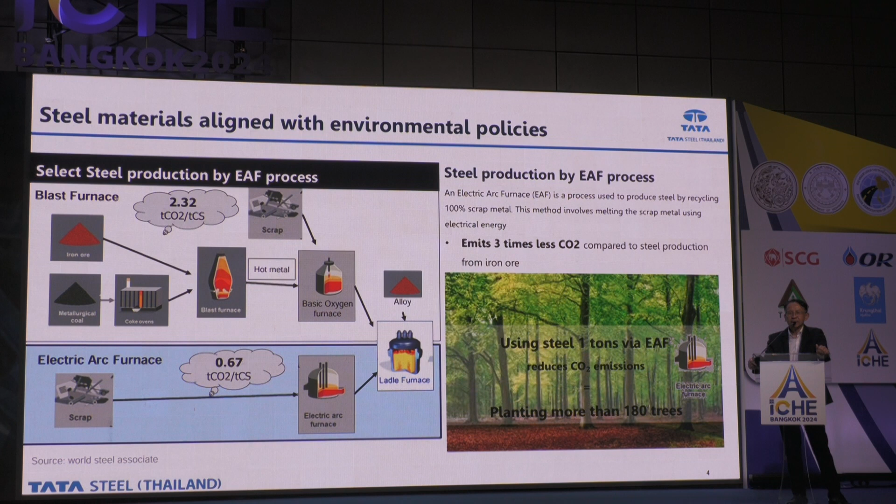In construction rebar, there are two processes to produce it. One comes from the blast furnace, which uses iron ore as raw material. The other process comes from the electric arc furnace, which uses recycled material, meaning scrap as raw material. But most steel companies that produce rebar use the blast furnace process, around 70 to 75%.

The point is that the blast furnace, which uses iron ore, generates carbon emissions of about 2.32 tons of carbon per ton of liquid steel. But the electric arc furnace, when producing steel or rebar, generates carbon emissions of only 0.67 tons, which is almost three times less than the conventional process.

This is one way to reduce carbon emissions for our planet. So comparing the two, we know it's 3 times reduced from producing rebar via electric arc furnace using scrap. If we use 1 ton of electric arc furnace rebar, it will save about 180 trees in terms of reduced carbon emissions.

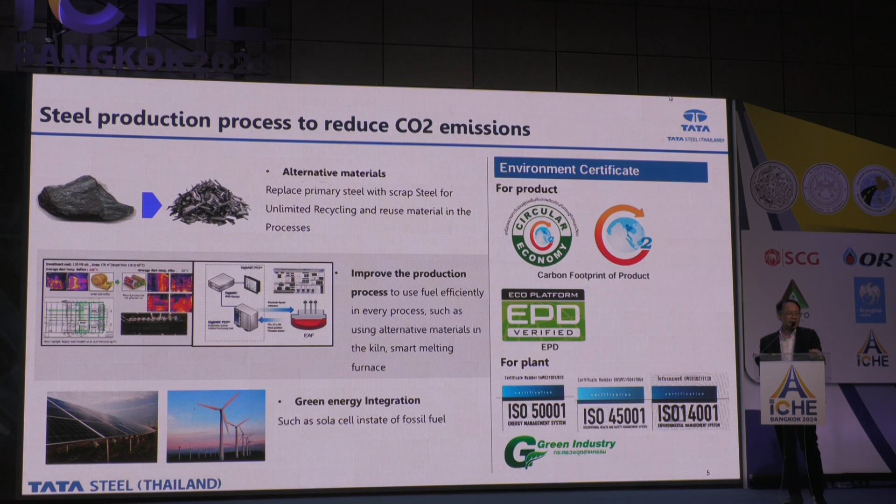Next please. Apart from the raw material that the electric arc furnace uses, we are also thinking about how to reduce the amount of steel needed. So the manufacturer can design, regulate, or improve the material or quality of the product. Instead of using plain steel, we can use high tensile steel, which reduces the quantity of steel needed. For example, if we use high tensile steel for construction, what we now call SD50, it can reduce usage by up to 20%, which means around 14 tons.

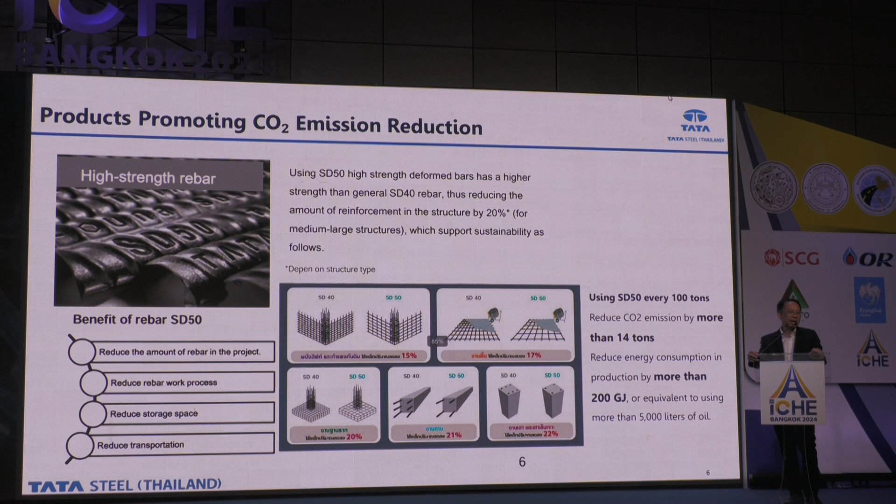So if we use the conventional steel, it will be higher than SD50, around 14 tons. This is just an example.

Apart from the materials - manufacturers try to reduce the time, because time is very important in terms of construction and also in terms of waste. So manufacturers also try to develop or introduce cut and bend from the plant. That means it can reduce waste and time, and also the quality will be improved, every shape will be as per the standard.

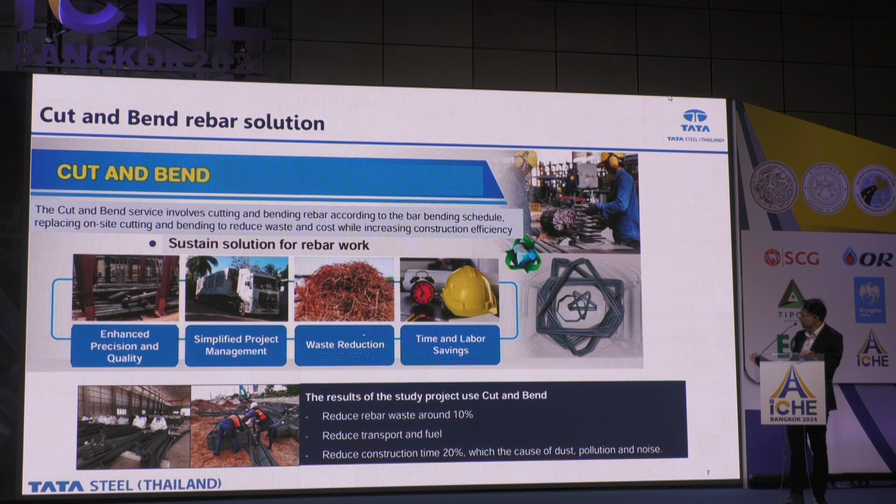So this is the overall of what I would like to tell today. One important thing is that manufacturers will try to improve or find ways to support construction in order to achieve sustainability. One is the electric arc furnace rebar, which can reduce 1/3 of the carbon CO2 emission. The other is to use high tensile or cut and bend rebar. This will improve the sustainability of our earth. Thank you very much.

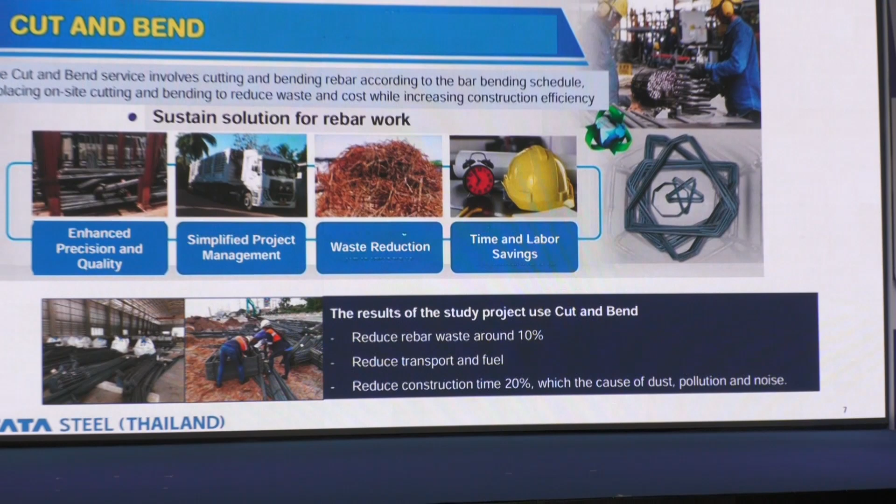Okay, thank you so much for a very interesting topic. If we integrate the manufacturers to be greener in process, particularly to reduce the CO2 footprint from the industry, it's going to ensure that the Department of Highway can develop highway construction projects that use not only digital construction but also friendly material construction. That is going to lead our society toward resilient and sustainable infrastructure development.

Okay, for the second opening speech, it ends like this. So the next session is going to be very interesting as well. Our session has 4 experts who are going to join, coming from the digital construction industry and also environmental and infrastructure monitoring technologies.

So let me introduce the first speaker onto the stage, Mr. Eddie Hong from Midas IT, South Korea. For the first topic, it's going to be about BIM and digital technology for design. Today we are very pleased to have our speaker, who is very expert in BIM and digital software, Mr. Eddie Hong. Let's give a warm welcome to Eddie Hong for the presentation on Midas CIM for engineers, utilization of CIM.

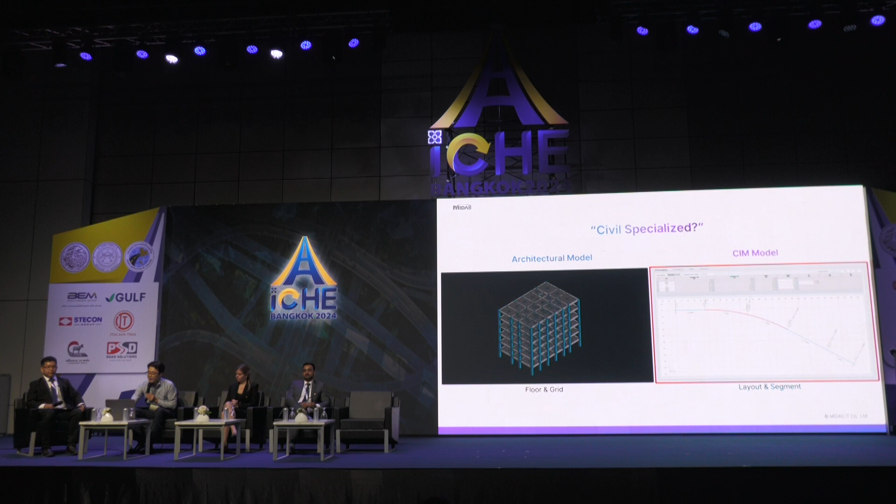I used the term civil-specialized earlier. Why did I say that? Typical architecture modeling tools support floor and grid-based modeling. For real work, it is difficult to present a 3D model of civil structures such as bridges, roads, and tunnels using that approach. However, CIM is a modeling tool based on layouts and segments, so civil structures are laid out along linear lines, as shown in the image.

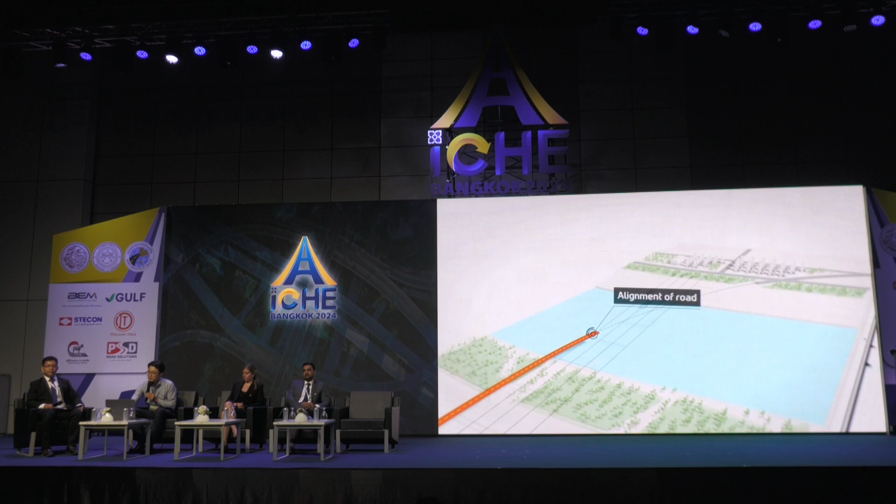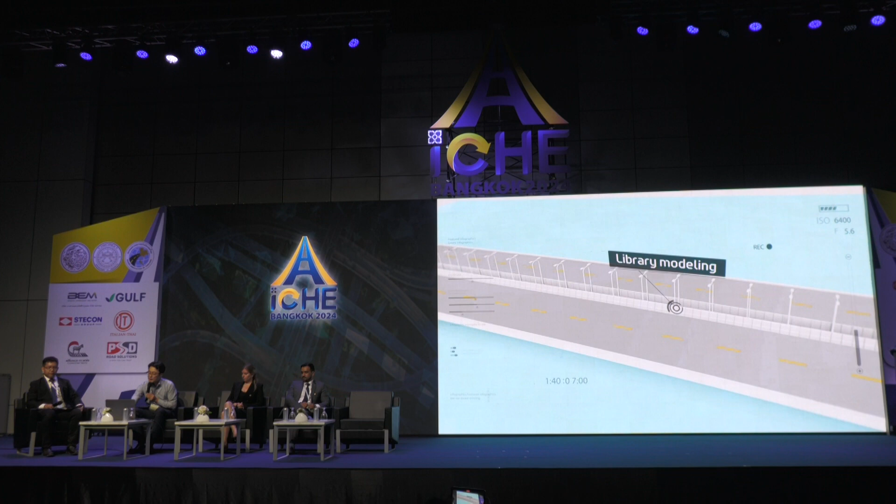This video is about 3 minutes, covering the Midas CIM concept. In our experience, when we work on civil engineering projects, we usually plan a linear line and build a bridge when crossing the sea or river. In the case of CIM, the model is completed by assigning the model to the location where the bridge is on the linear line. The model is also linked to the changed alignment, reducing the modification time for all engineers.

If we change the layout line, it will upgrade directly in the modeling. We can also check the value of intervals or update the model automatically. Our CIM program represents detailed rebar arrangements, even including tendons, splice joints, and coupler assignments.

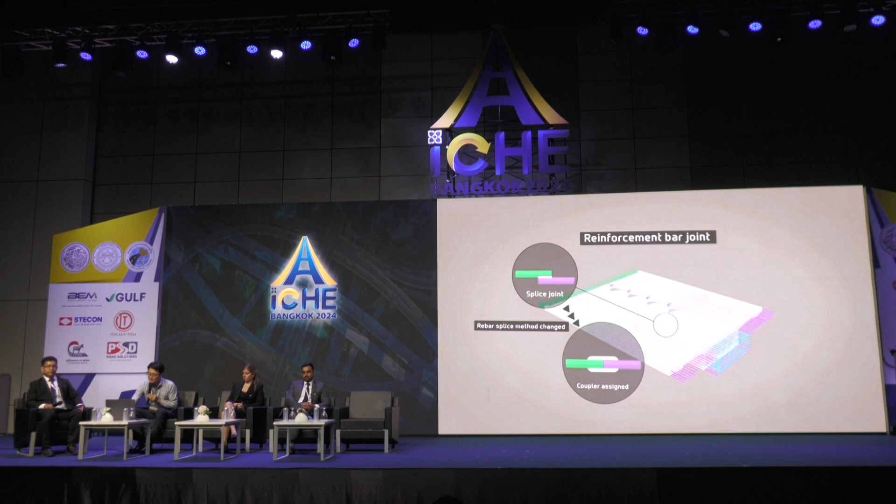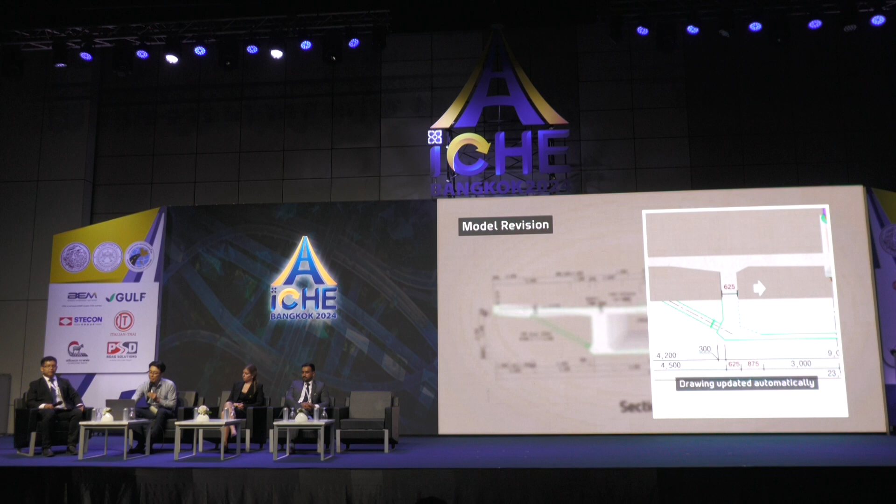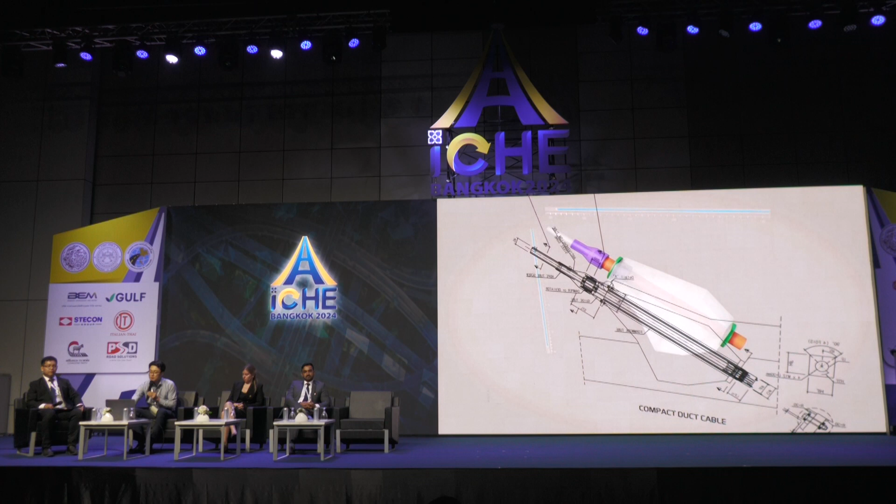Lastly, we can check and generate the 2D drawings from 3D modeling, and we align the 2D and 3D model. So if we change some parameters in the 2D drawings, we can upgrade directly to the 3D model. And finally, we export to the civil software, by which we can analyze the FE model.

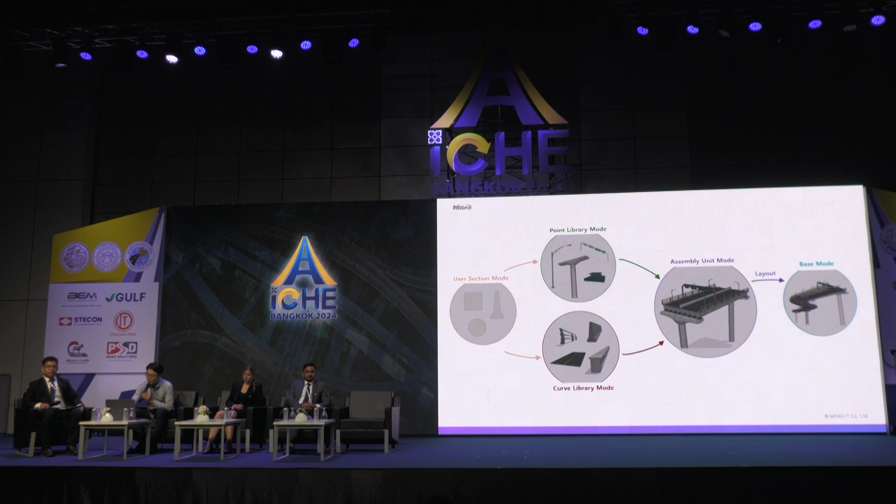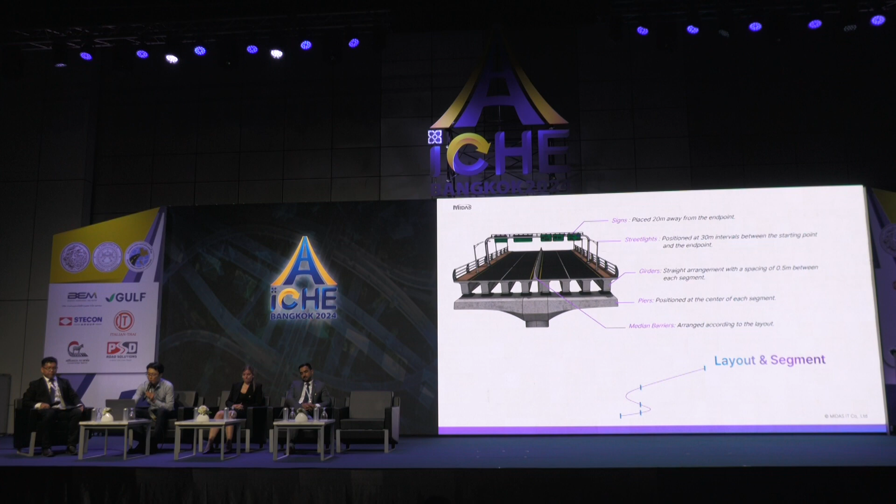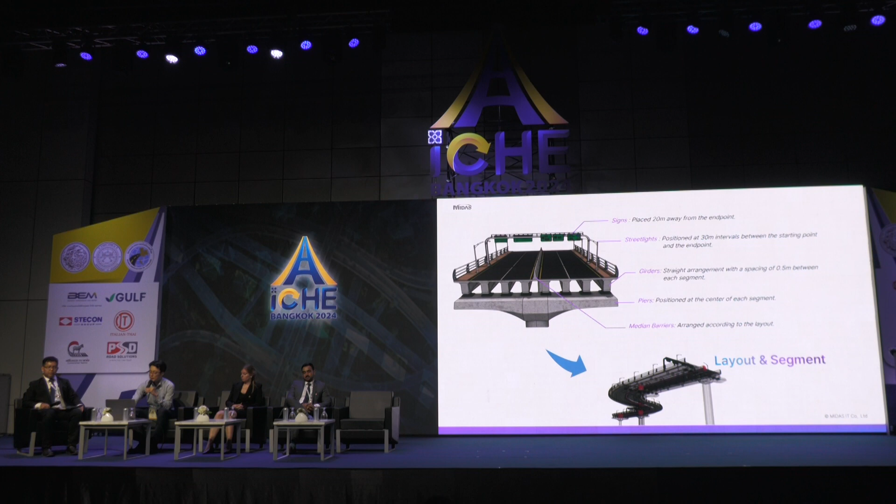That assigns the assembly libraries to the linear to create the final model. So we can make a model of all these components, like signs, even piers and barriers. And lastly, if we make a model of the libraries, and then assign the layout, and finalize the 3D model. So let's go ahead and show you how to actually model the bridge in CIM.

I would like to introduce the smart template and catalogs. We already have some libraries in the software, so we can check some libraries and modify the pre-stressed concrete bridge, check the layout, and then make a modification in the smart template library for girder ranks or other components. And lastly, we can check the other components.

And then sorry. Okay.

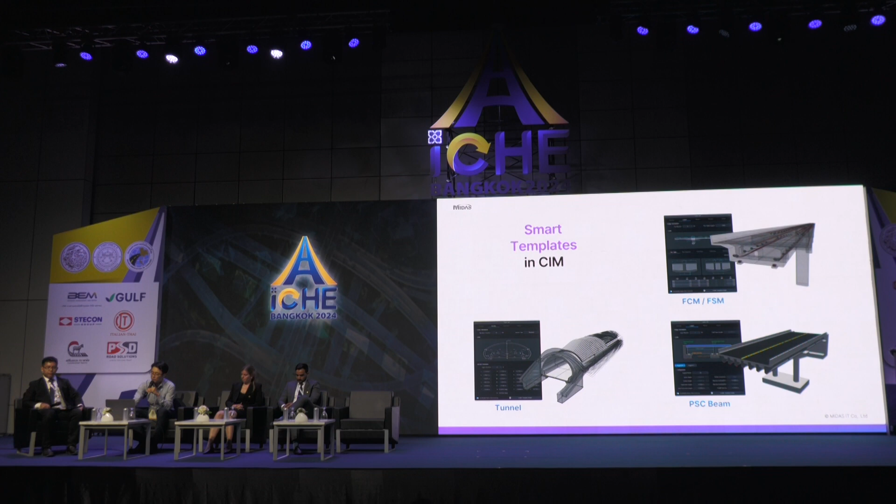Besides the PSC beam bridges, there are many other templates in CIM, like tunnel and other bridge methods, FCM, FSM. We even offer special bridges like cable-stayed and suspension bridges. You may not use these often, but they can be useful if you need to compare bridge types in the planning stage.

And as I mentioned earlier, there are about 200 libraries built into our catalog. So you can just download and use them if you need to. You can modify and adapt them. In fact, you will be more efficient in your work by modifying and adapting provided libraries rather than creating them from scratch.

So far, you are getting the idea of modeling. How can we utilize this software? So let's take a look into how you can utilize the model you have created. In CIM, you can actually do a lot of different things with the model that you create.

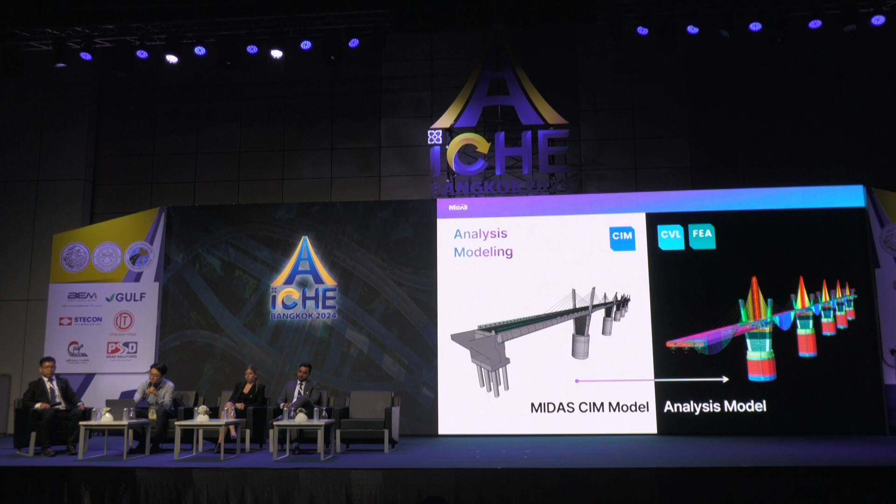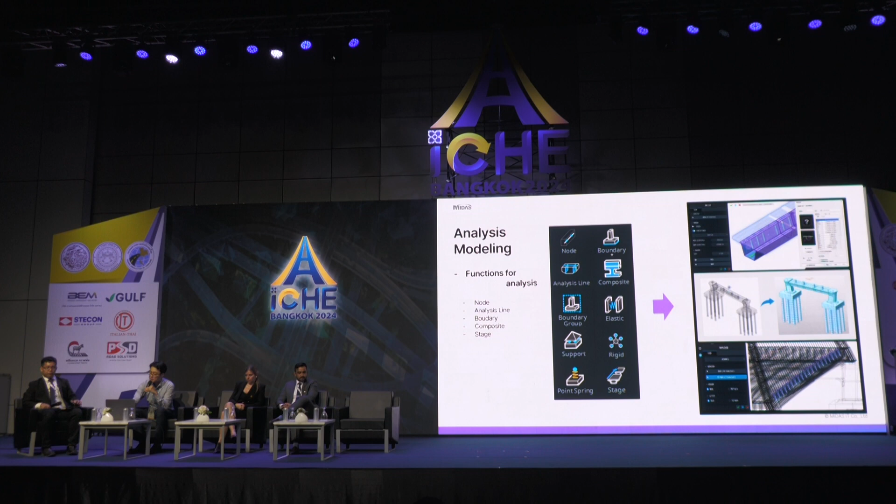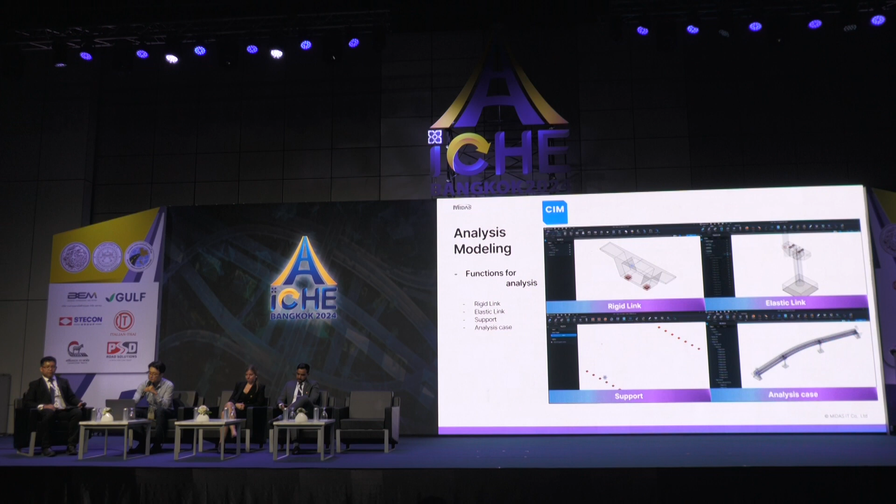Let's take a look at how we can use these features to export a 3D model. We can just create the analytical model using these features.

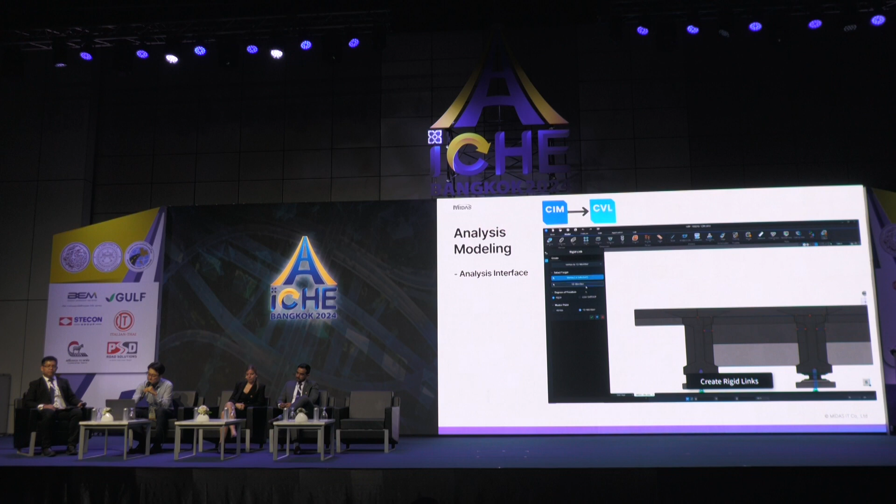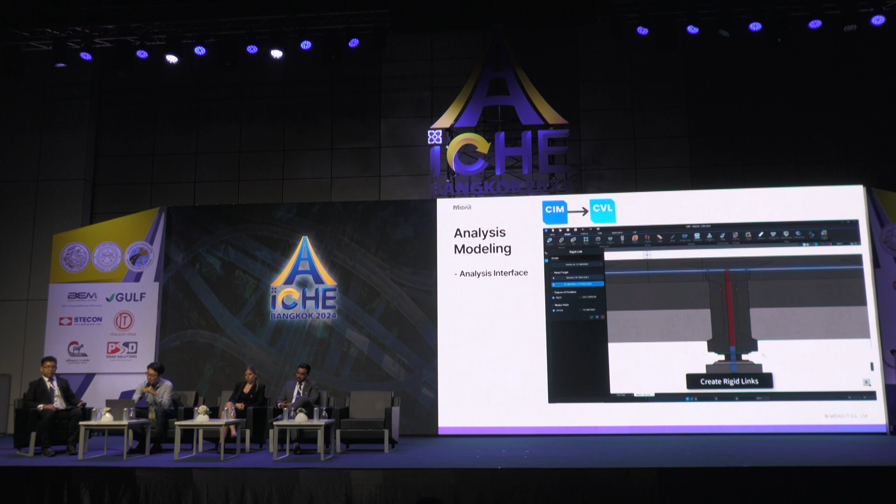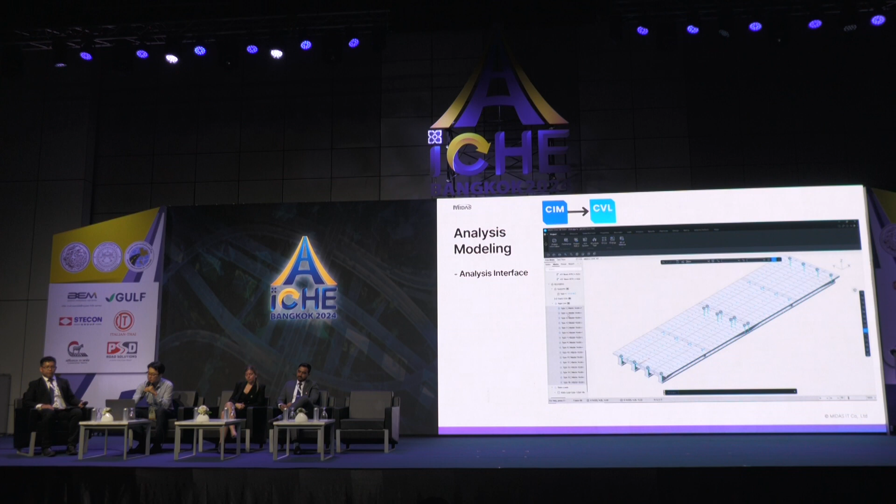If we change the girder with a composite section to create the grid model, after defining the case conditions to create the analysis model in this mode, and click export, the analysis model will be created in our Midas Civil software. And finally, you can see the boundary conditions and section information that we applied earlier in the CIM model.

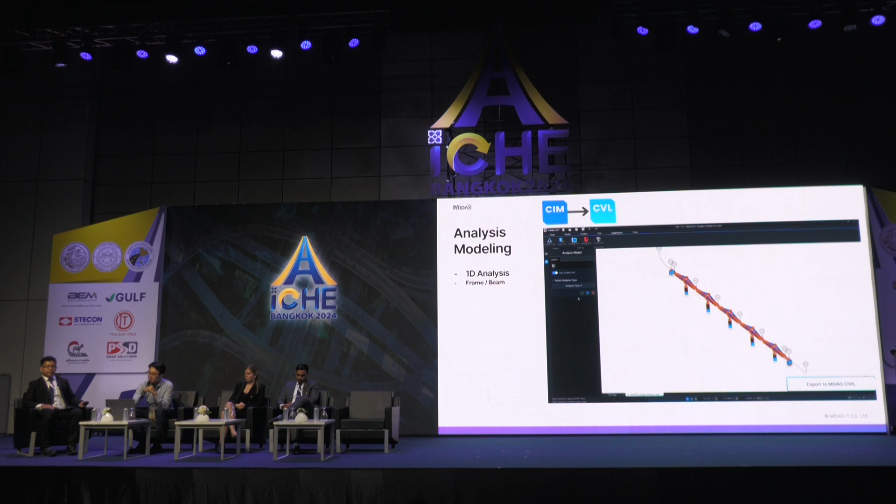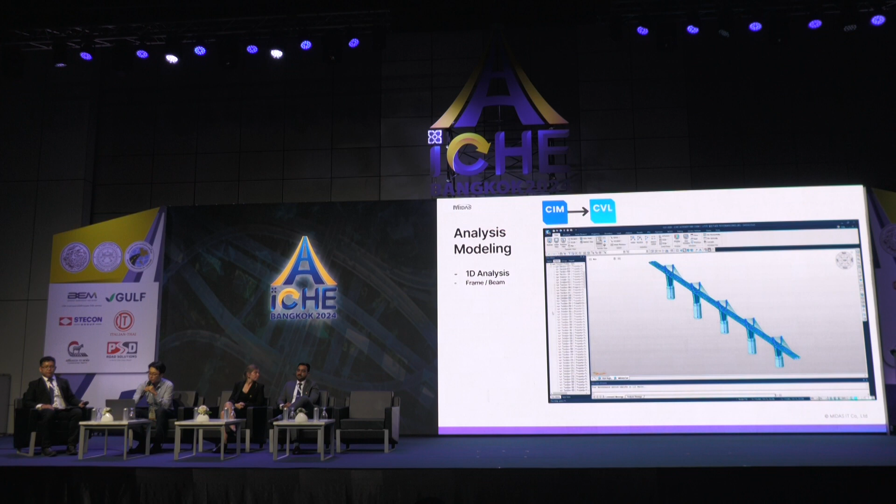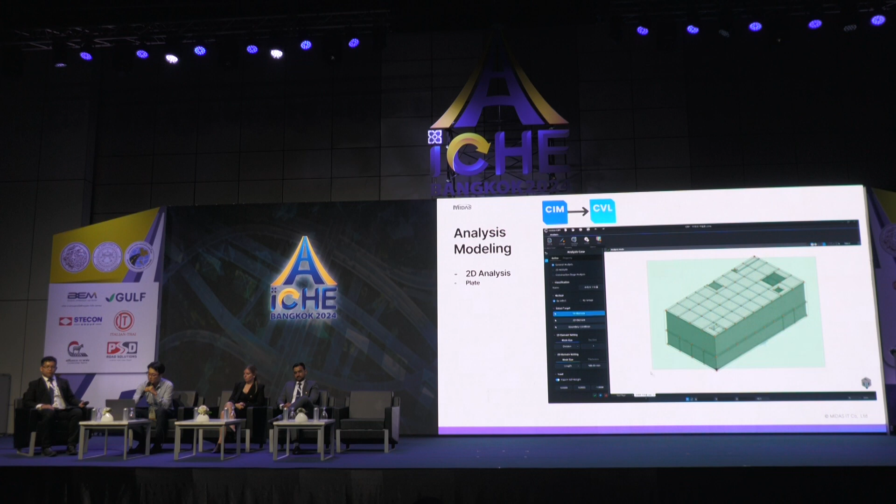Is this only possible for this bridge? No, it doesn't have to be. Special bridges with tendons like this can also be interacted with. Of course, additional loads and load combinations are required, but the modeling works very well.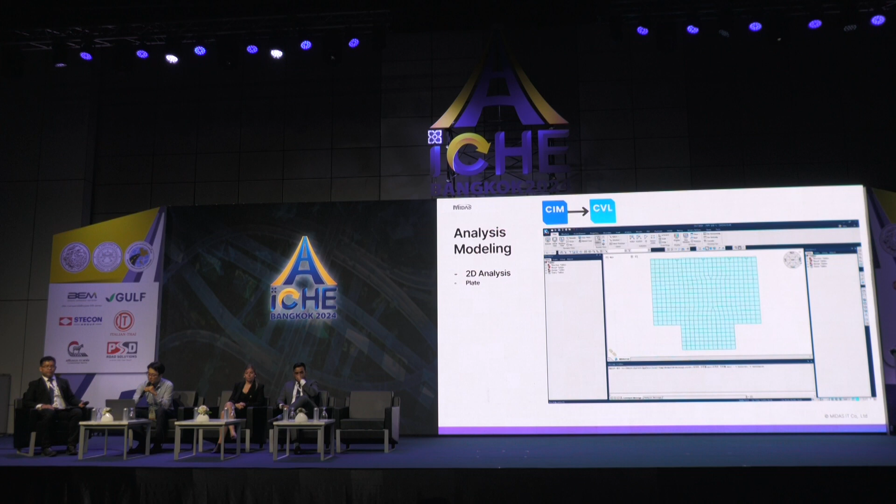When designing a structure with complex forces, a 3D analysis model may be required by the client. So if you need a plate model, such as the structure in the video, you can easily link to 2D plate elements using the slab elements feature. So you can see how well it works.

And in this part, as you can see, the parasolid type object provided in the CIM model is exported to FEA software to perform FEM analysis.

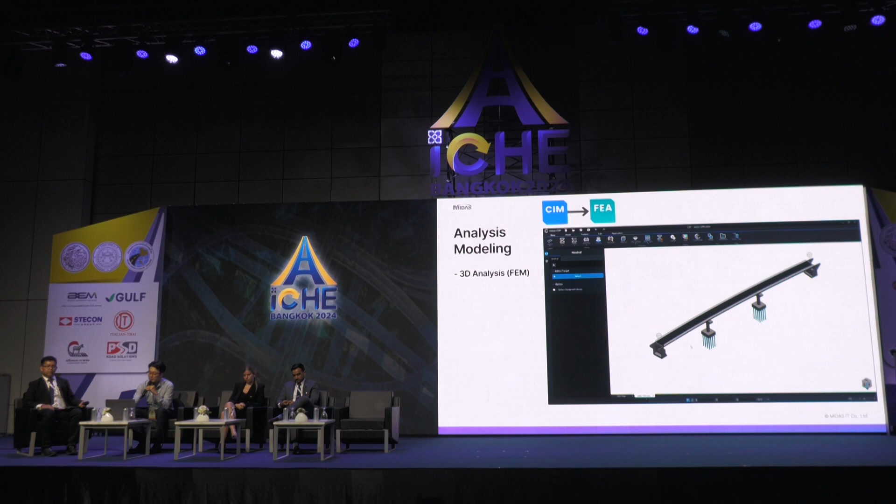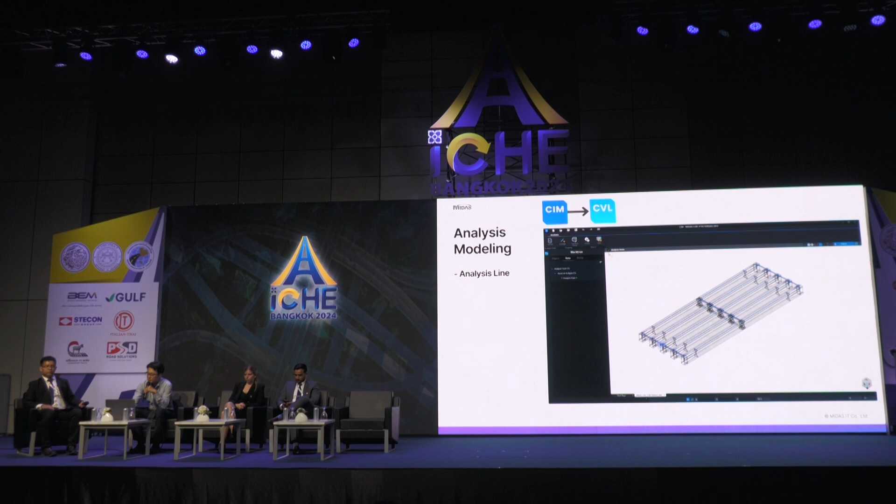Models created in other 3D tools like Revit software or other 3D BIM software can also be imported this way to create an analytical model. In this video, a parasolid model created in another software is imported into CIM and then used to create the analysis model using the analysis line function.

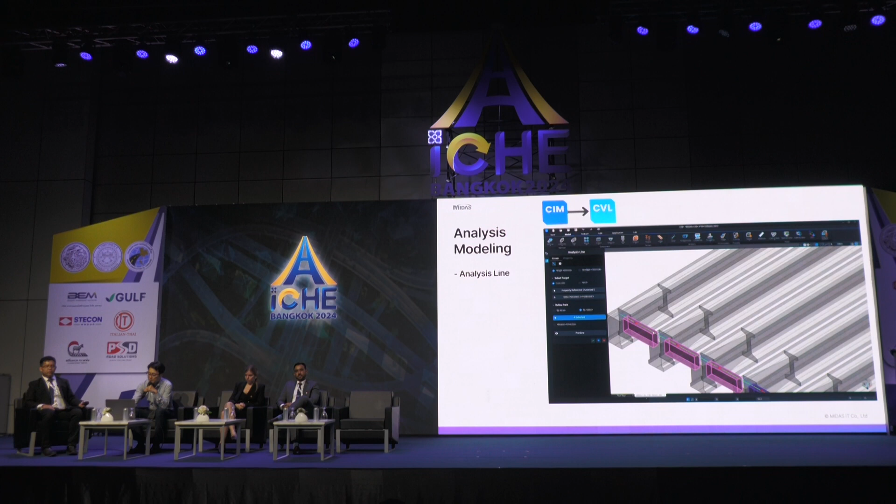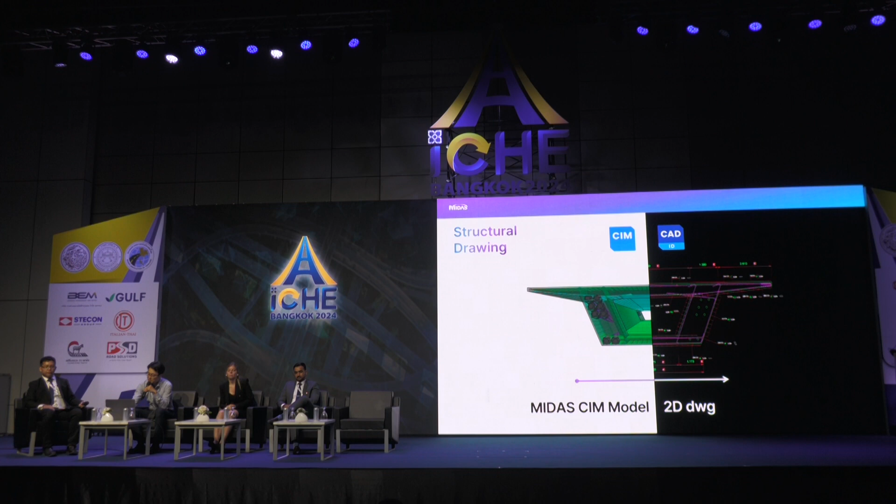I think everybody has different needs depending on their role and the size and strategy of their company. Some of you are engineers, so drawing capabilities matter. It depends on your industry, but drawings are always required as part of design.

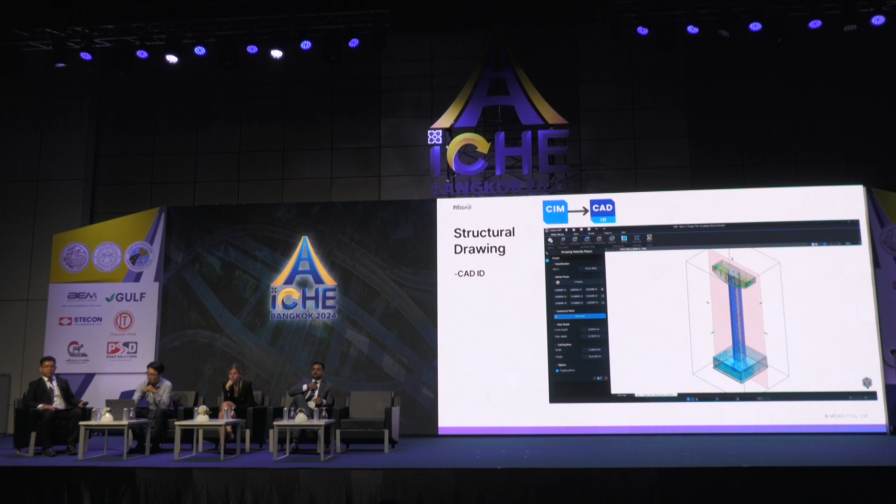In short, in CIM you can extract drawings using the drawing functions. You can create a section drawing of any section, and rebar drawings with bar width. You can extract the geometry and draw it, simply exporting dimension lines.

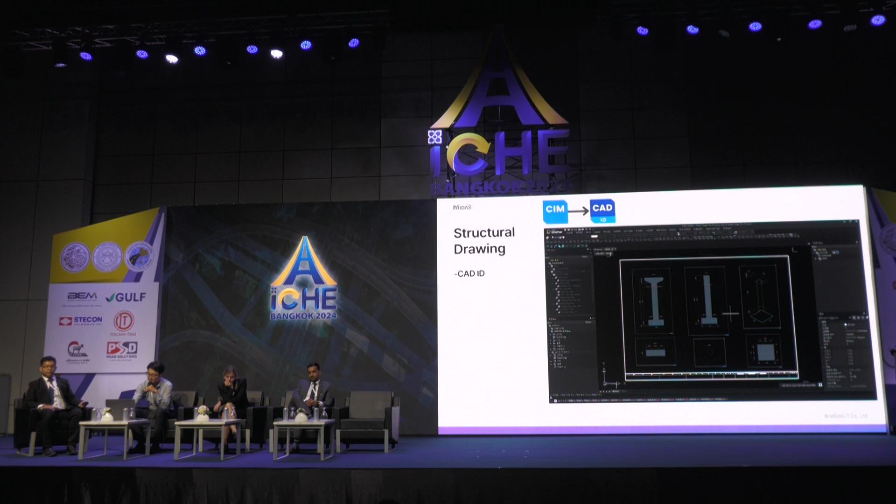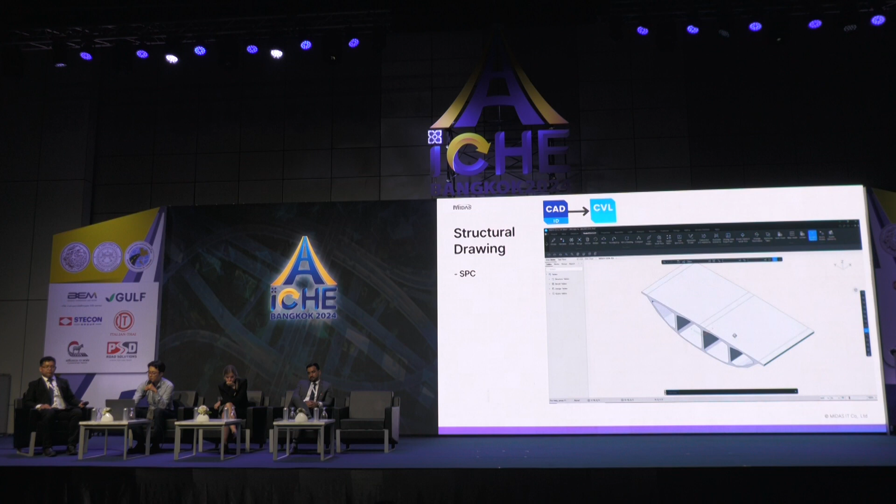Also, when using existing civil features for general sections that are not provided as DB sections, you have to create sections through the SPC function. Some people may have difficulty using it, but now you can do this with Midas CAD software design as well.

There are a lot more functions in CIM. In the following, I will introduce other various features of CIM.

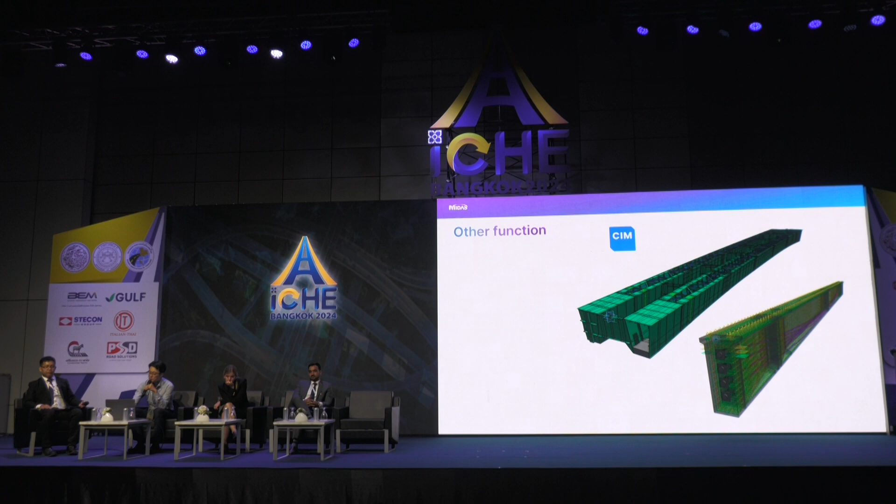First, this is a feature that allows you to add detail to your model. It automatically generates bolts and stiffeners that are used a lot in steel bridges. It also provides the tendon generation function required for PSC bridges, and it's possible to create distribution diagrams. A rebar input function is also provided.

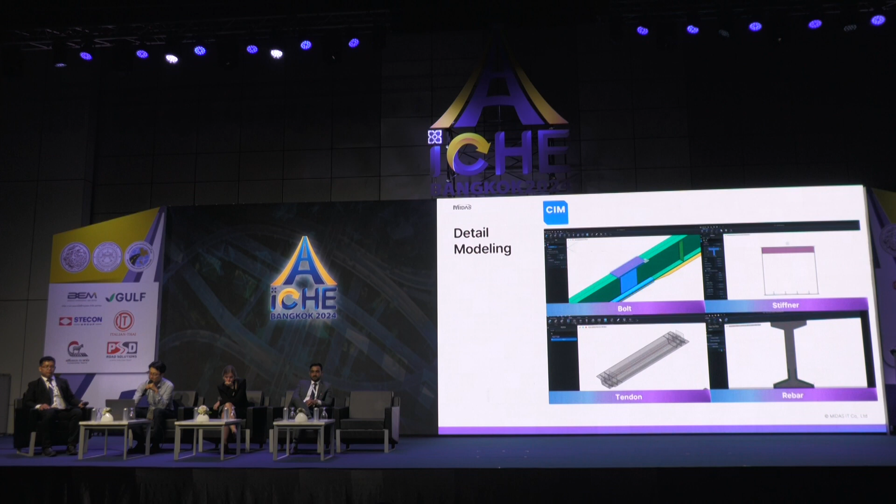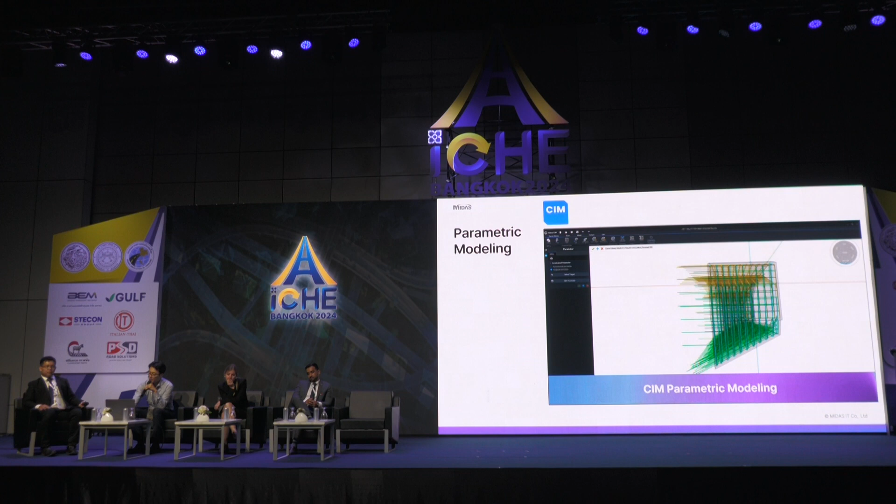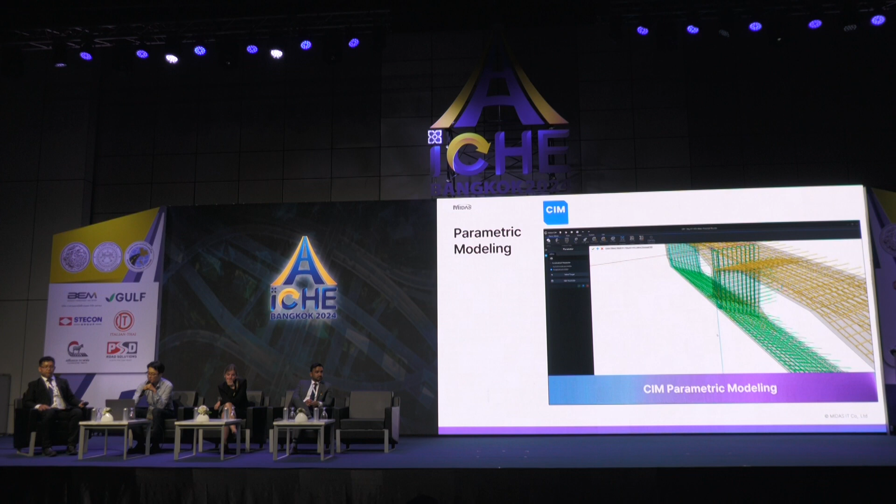This is a description of the parametric model. For example, the geometry model may change due to changes in the plan. In this case, model modification is required, so you can easily change the shape through variable processing, as shown in the video. Even if rebar is modeled and rebar information is linked, you just adjust the variable of the shape.

Finally, there are a number of CIM's competitive advantages, which are the import and export functions with CIM. You can import and export to IFC, Parasolid, and CAD objects, etc. It will be needed, so let's take a quick look at how they are compatible.

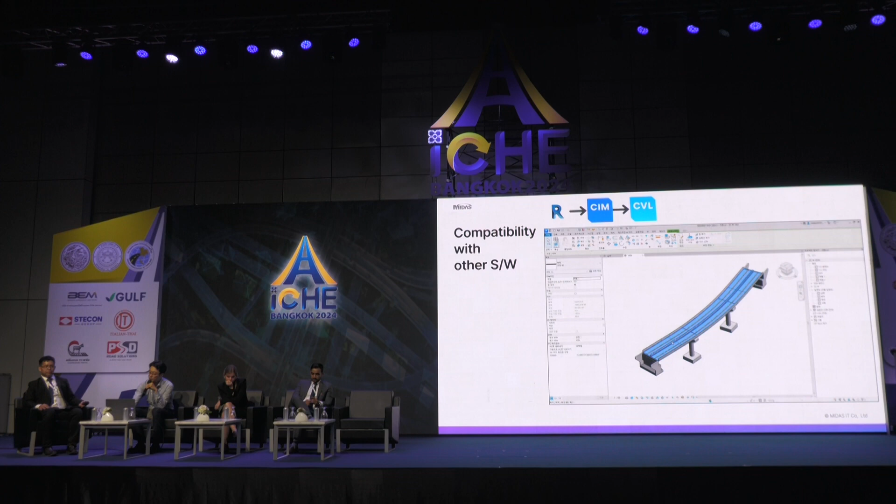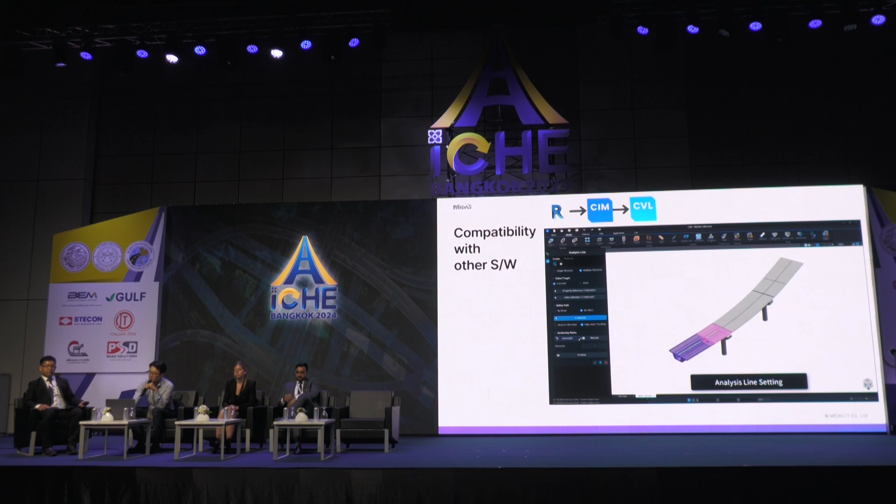You can import a model created in Revit software into CIM and link it with the civil analysis model. This is possible by utilizing the analysis function.

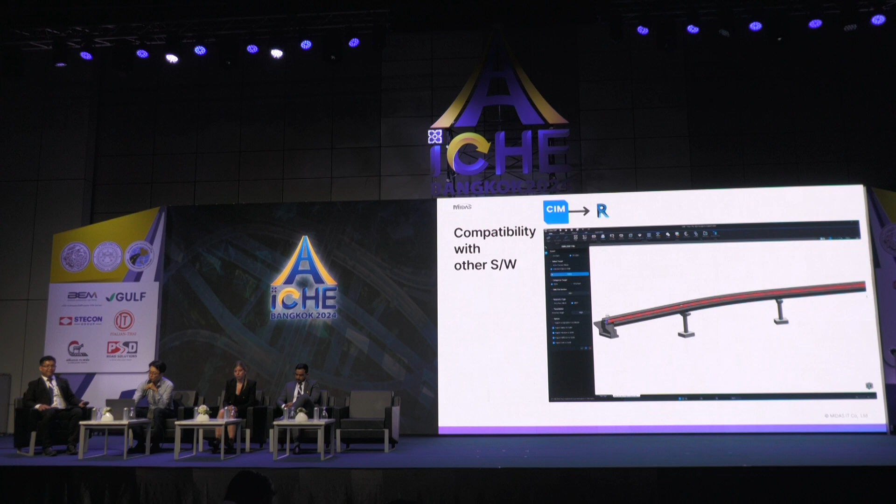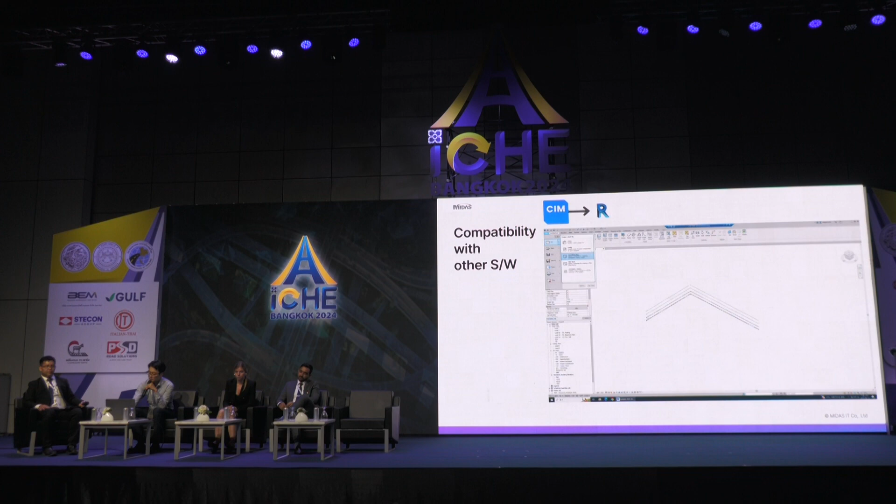You can also do the opposite process, exporting a model from CIM to other software. A 3D object model created in CIM with library information, if necessary, can be converted into IFC or other formats.

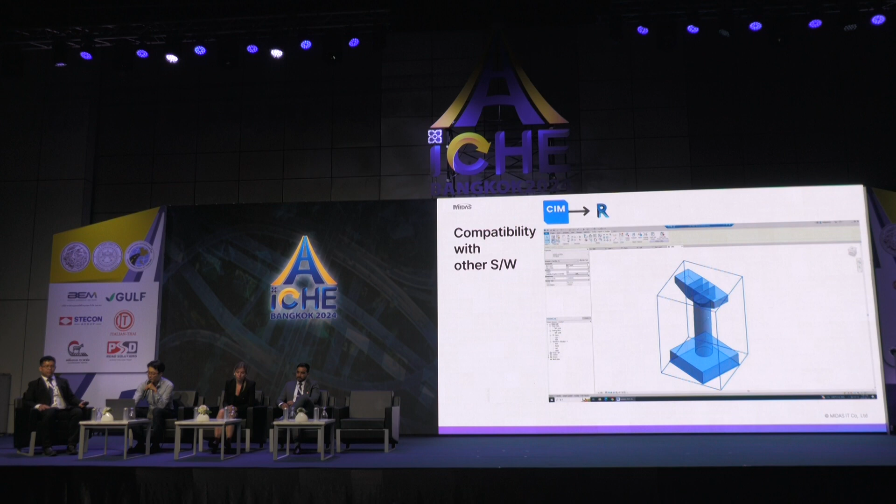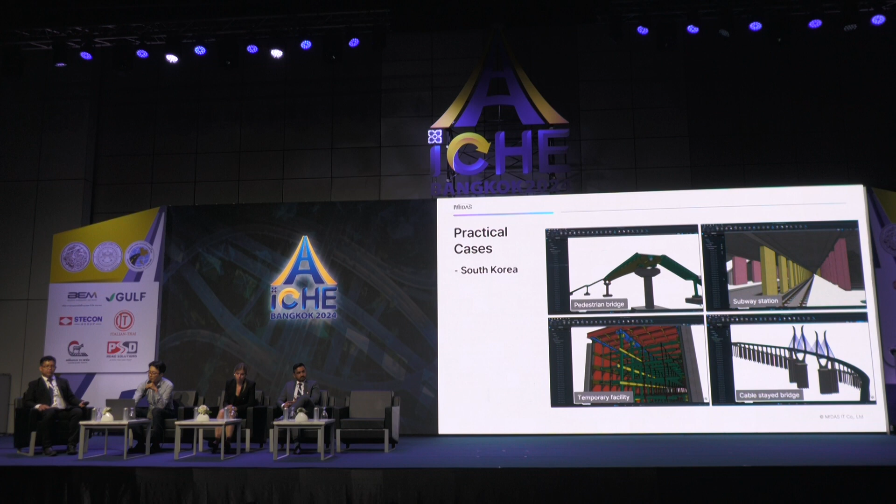Finally, let's take a look at some examples of what we have been able to do with CIM software in real projects. In Korea, where Midas has its headquarters, many structures are modeled using CIM. It's used to design general bridges, including pedestrian bridges, subway stations, and overall civil engineering structures, such as cable-stayed bridges and temporary facilities. Here's a video of one of them.

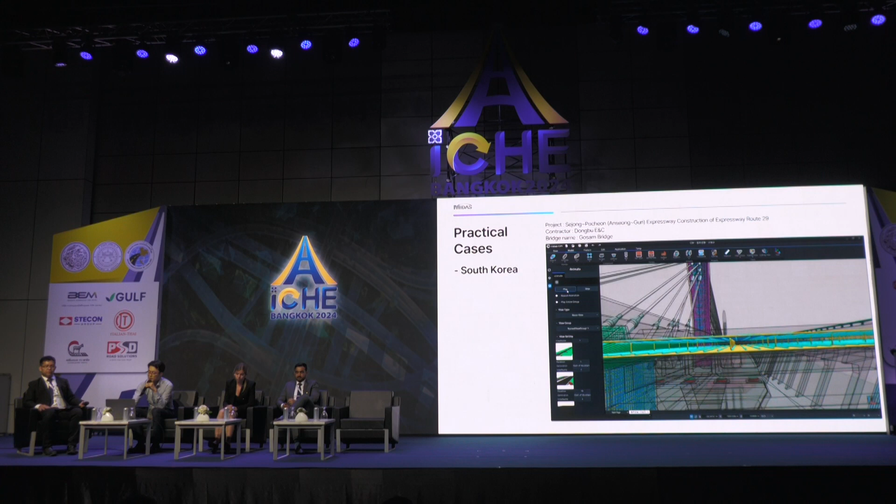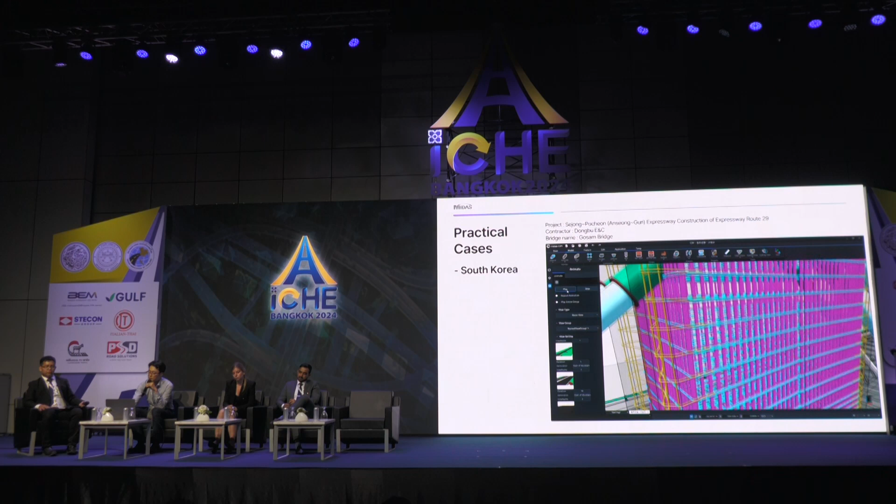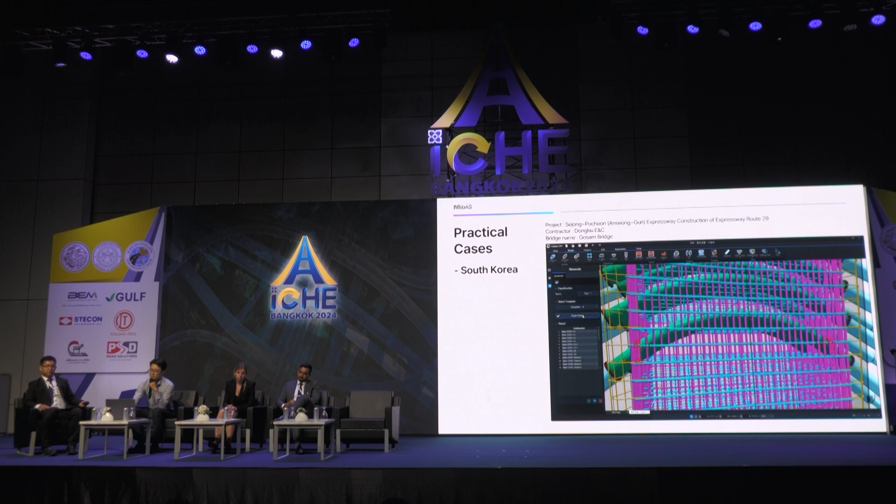Right now, the most active users of CIM are in China and India, where it's being utilized by civil engineers for a wide variety of bridge projects.

The DongJiang bridge you see on the screen is a two-tower cable-stayed bridge. For concrete cable-stayed bridges, PSC box girders are usually applied. We wanted to easily manage the model and tendons on the PSC girder, so we used CIM, which provides a tendon generation function.

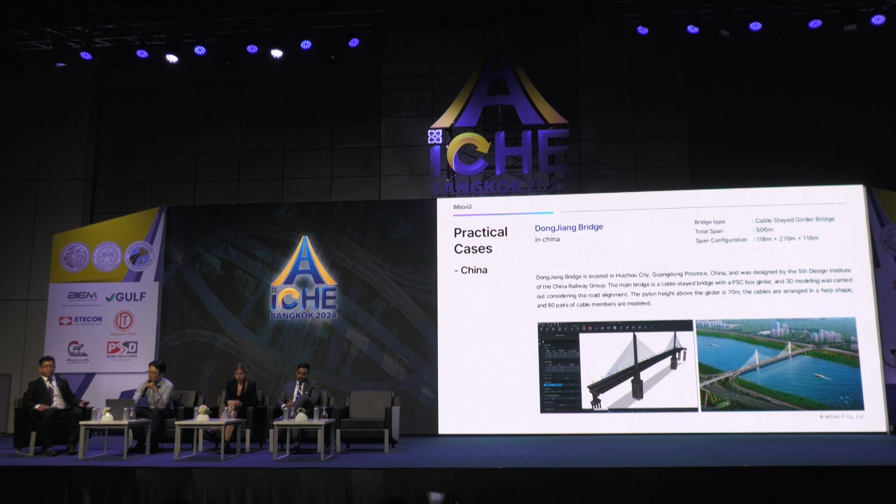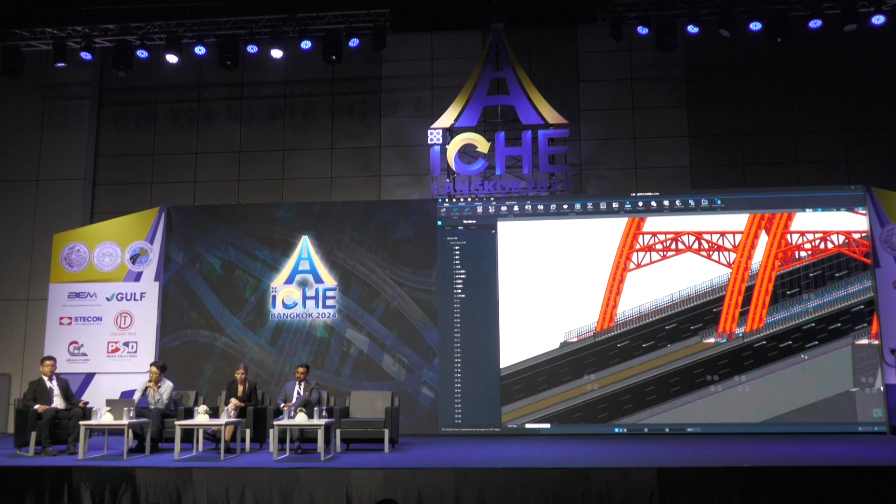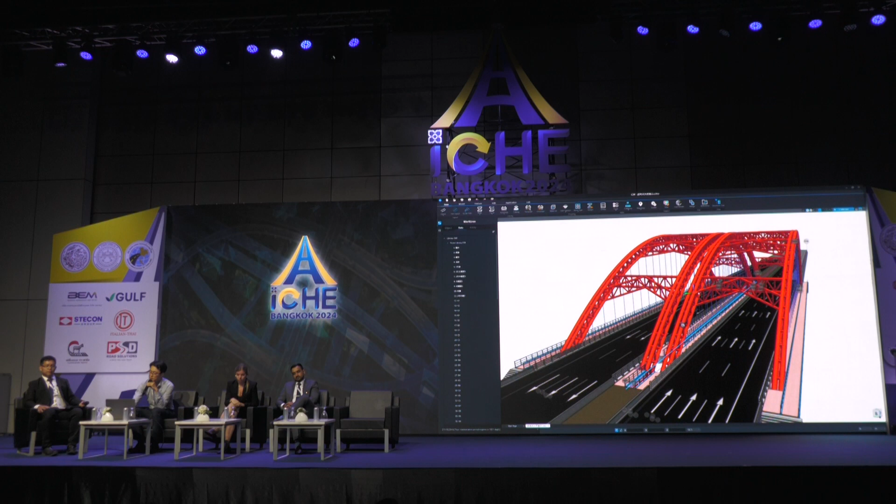The last one is another video. As you can see, this is a very complex arch bridge. It was a project that required a high level of detail, so we used CIM, which has a lot of modeling freedom. This is how the rendering was created in the CIM software.

Now let's wrap things up. We have been talking about how Midas CIM software can be utilized by civil engineers. At Midas, we think about what is the easy way to make things a little more efficient for civil engineers.

CIM will definitely save modeling time, and it is not difficult if you try it. Some Korean and Chinese engineers are using it, mostly reaching an intermediate level or above within about 2 days. So you can utilize it for any project with CIM. Honestly, if you only learn the functions required for your task, one day is enough, I think.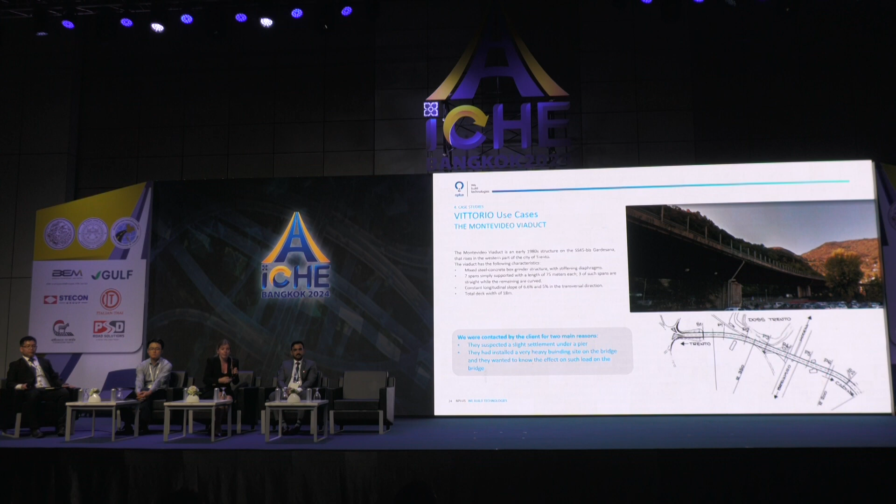The first case study I would like to present is Montevideo Viaduct, located in Trento, the city where my university is. The problem with this infrastructure, a steel structure that is simply supported, was that the hill behind the structure was having a landslide. So the owner was worried that the pier was affected by this landslide. What we did was design a monitoring system to monitor that single pillar.

We used accelerometers to detect the modal shapes of the two spans next to that pier. We used this configuration because it's the best one to detect both the longitudinal and transversal modes.

Then we put inclinometers on the spans next to the pier, because if the pier is sinking due to the landslide, then the two spans next to it are rotating. Finally, we realized that if those two spans are rotating, then probably the joint between them was stuck. So we also installed displacement sensors, potentiometer sensors, on the joint.

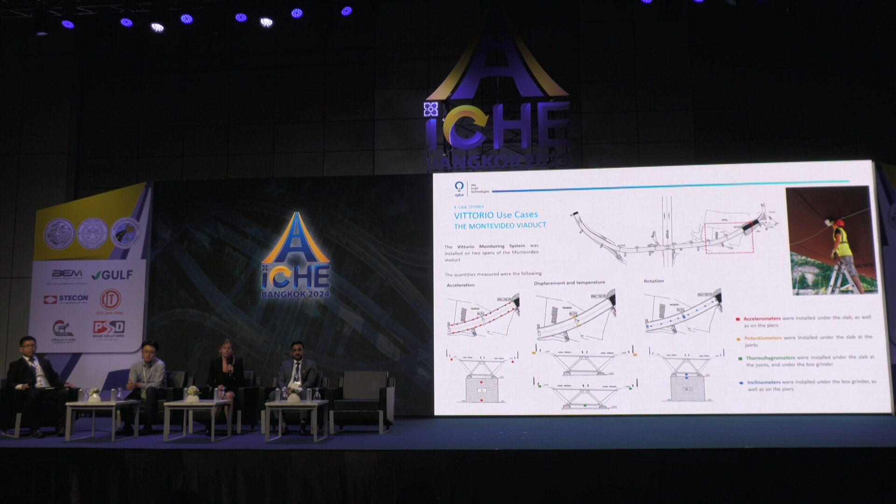The first data we analyzed were the vibrational data, coming from the accelerometers. This allowed us to detect the modal shapes. We had the first three modes, 1, 2, 3, but then we noticed three peaks on the first mode.

In data analytics, this can have two meanings. One is noise, which might be because that was a high-speed road with trucks passing, so it could be a bit of noise. But there's another explanation: this is the behavior of a continuous span, which has the first three modes overlapped.

So we needed to verify whether this was the case or not, because this was a simply supported bridge. If it was behaving like a continuous span, then maybe the joint was actually stuck, as we believed.

So we immediately looked at the joint displacement measurements. We saw this behavior, but we weren't worried because we know Italy has very high temperature variation. As soon as we compared it with the temperature trend, we immediately saw a correlation. It was very clear at bare eye, but we also ran an algorithm to thermally compensate the data, to clean it from the temperature effect. This was what we obtained.

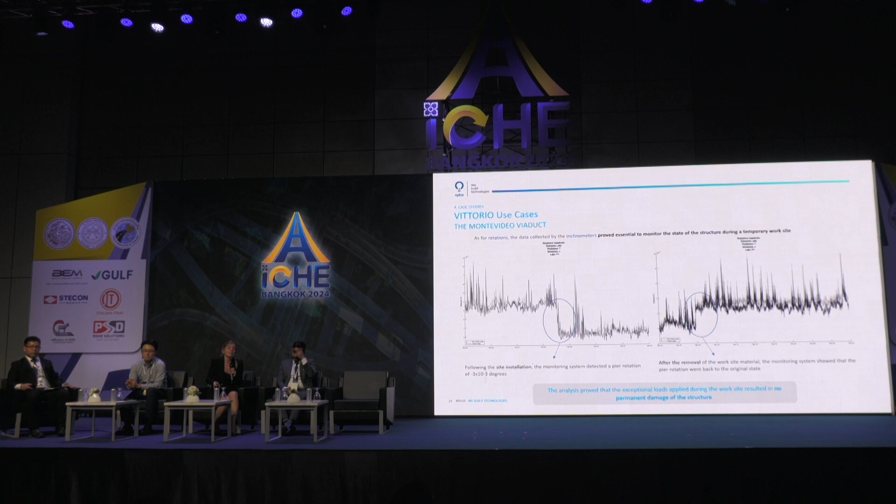This was very good news for the owner, who was able to put the capital expenditure of that year into another structure that needed intervention the most.

The second case study is the Duomo Cathedral, the Cathedral of Milan. The situation here is pretty similar in some ways. This is a historical structure, and the problem is that the square underneath the Duomo is slowly sinking. The problem here is also that we do not have the original design plans of this cathedral, so we don't know how the foundations are actually made in this particular building.

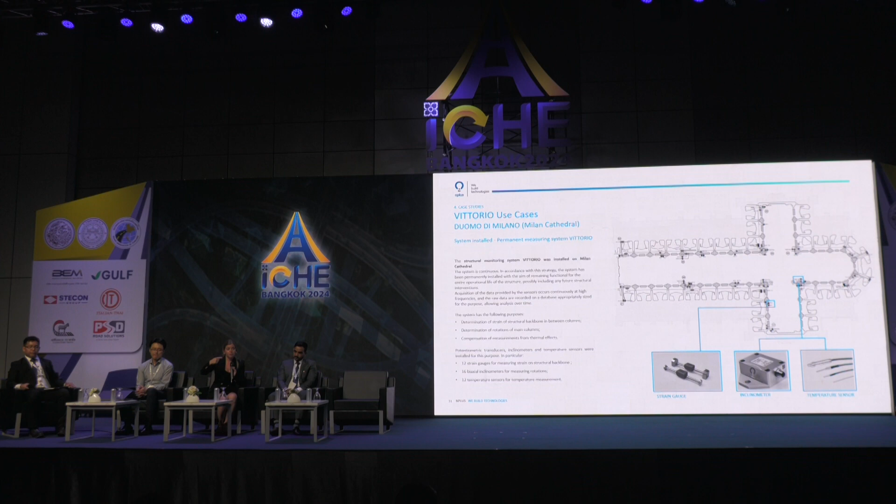So what we decided to do here was a static monitoring system where we put inclinometers on the main columns so we could see the rotation of the column due to the sinking of the ground underneath, but also strain gauges, because we realized that if the displacement underneath the Duomo was differential, then probably the horizontal elements were undergoing an abnormal stress on them.

So, for now, the Duomo is perfectly fine, but this case study has two main meanings. One is, of course, the safety of the users, because thousands of tourists enter this building every day, so as soon as there will be something off with the structure, alerts would go off and the structure will be evacuated.

But especially, what we are doing here is that we are giving the data coming from the sensors to the Polytechnic of Milan, which is using the data to reconstruct a beam model of the cathedral and do some simulation to understand how the actual foundations are.

The problem in this bridge was caused by the old age of the bridge, and especially by the fact that the loads on the bridge are increasing very fast. The owner of the bridge actually put a load limitation on the bridge, but the fact is that he knows it is not being respected.

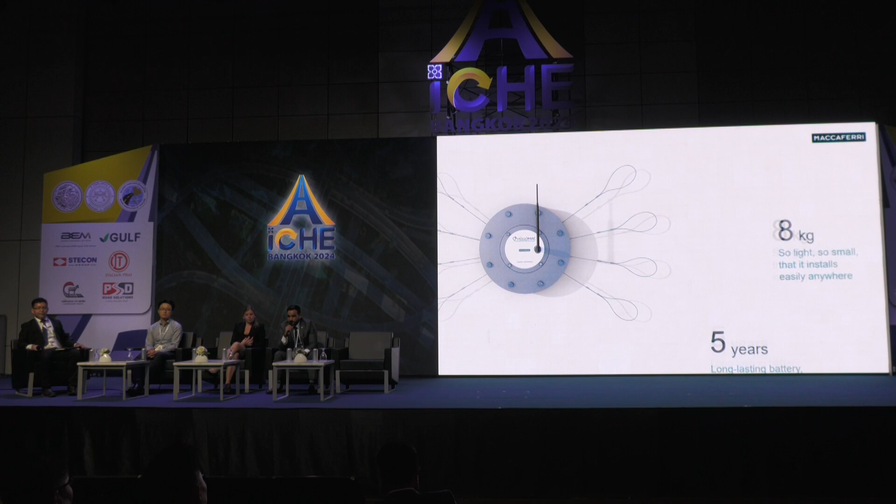As we all know, when we install rockfall barriers or draperies, power supply is a big challenge there. So for our HelloMac device, power supply is not a concern because it is powered by lithium-ion batteries, which has a life of more than 5 years. Currently, we have 7 batteries in one HelloMac device. In past 7 years, we had case studies, we had HelloMac with only one power battery, and it's still working. So with 7 batteries, we are expecting at least 5 years.

So how does this device work? We have sensors, they are triggered when an event happens, but how do you get to know? It works via 2 ways, first is satellite and second is GSM. It's not like it will have satellite and GSM both, it will have any one of these, so there'll never be a point when the device will be out of coverage. And as we know that in terms of a rockfall event, time is of essence. Whenever an event happens, we have to stop the movement of people and traffic in that area. So when an event happens, the alert is received in less than 3 minutes.

And how it is received is via SMS, a proprietary application, and email. We have a proprietary application which is available free of cost for iOS and Android devices. In this, we can also have the real-time insights of our device, where the device is installed, where the central system is installed. On the screen, you can see there's a Google map in the application. And in this application, it's not that one device can have only one application. Every device comes with its own user ID and password, and it can be used in n number of devices. So there's no limitation to how many devices can get the alerts.

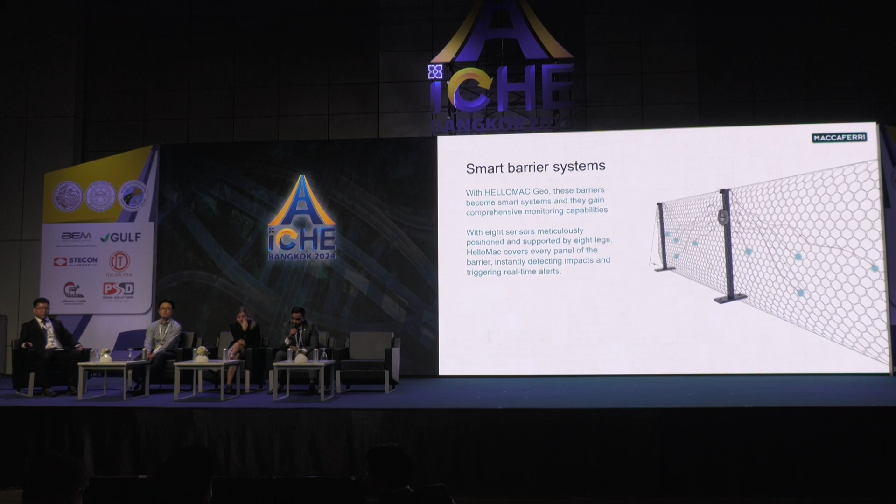Here you can see these legs going on, like a spider web. These are the sensors, and in between, the HelloMac is attached on the rocks. The principle says HelloMac and the sensor end have to be stable, so that when the movement happens, the rope gets pulled and the sensors are triggered.

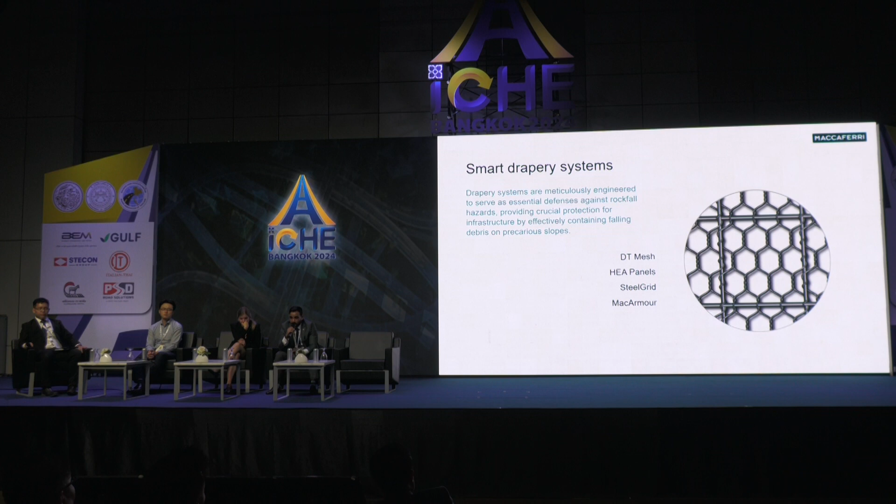In Maccaferri, we have 4 types of solutions for slope protection: DT mesh, HEA panel, steel grids, and MacArmour. Our solution of HelloMac can be installed on all of these. Again, the same picture, as I mentioned, it's going to be a spider-like arrangement.

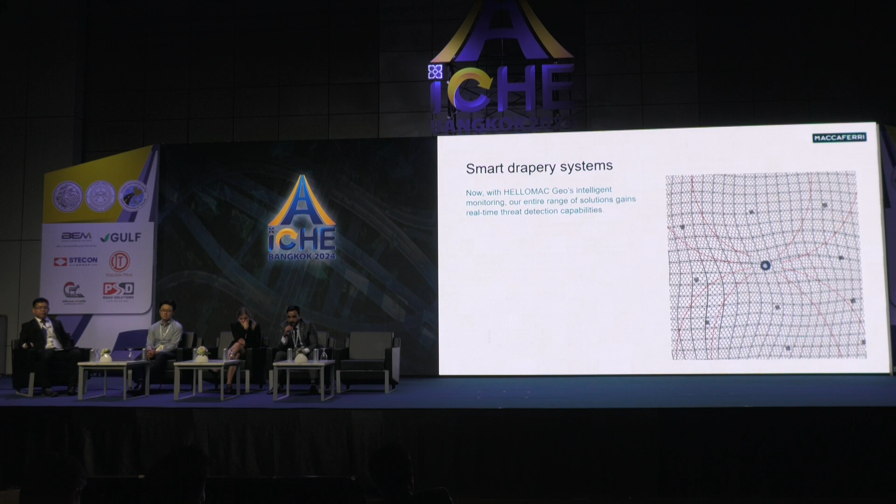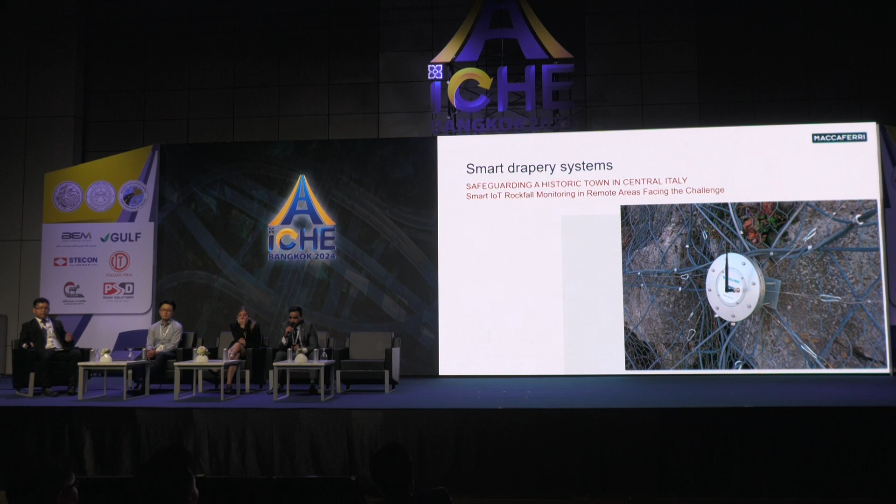With one HelloMac, we can cover more than 1,000 square meters of area. It's not that only the point where the HelloMac or sensors are attached will be triggered. Any area in between, when any rock movement happens, you will get a trigger and the alert will be sent on your phone. Another case study from Italy.

We have installed 6 HelloMacs on a loose drapery system. Next, we are going with retrofitting.

What does retrofitting mean? For example, you have installed a rockfall barrier of some other company. As much as we want all barriers to be Maccaferri, that does not happen. So if anybody's rockfall barrier is installed, our HelloMac can be customized and retrofitted on that. Rockfall barrier, drapery system, whichever manufacturer, our HelloMac can be customized. Generally, customization means setting up the energy levels at which a trigger happens.

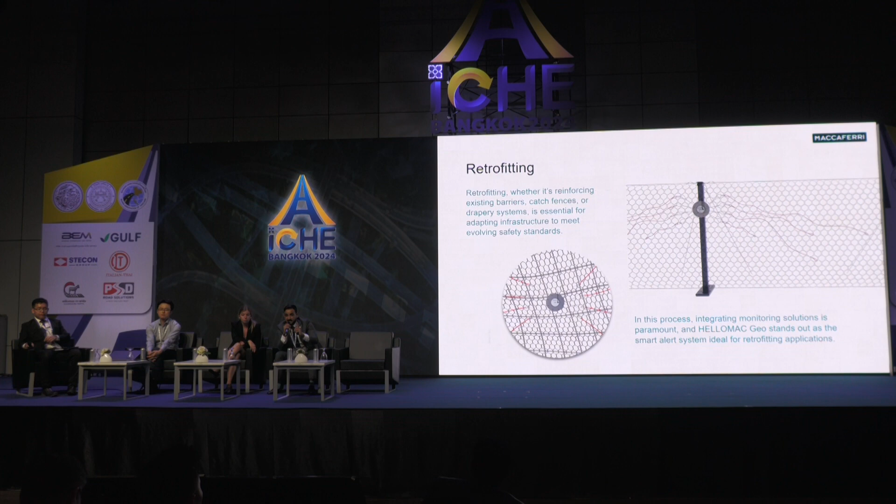The question arises, what happens if some animal falls on the barrier? Will you get a trigger? No. The reason is, when we install it on a barrier, there are two energy levels: first is the maximum energy level, second is the SEL, service energy level. We always customize the legs of the HelloMac to those energy levels, so that when a rock hits, only that trigger happens. Otherwise, no false triggers.

Moving ahead, another case study in Italy. This was on a debris flow barrier, on a very important road connecting Italy to Switzerland. We managed to install 43 HelloMac devices on that this year.

Going to the last application, which is geostability monitoring. What does that mean? For example, we have some loose rocks, but we have not decided yet whether they are fatal or dangerous for us or not. In that case, when we are not in a position to do any protection works, we can install HelloMac directly on the loose rocks, so that when any movement happens, the alerts will be triggered, and accordingly we can decide whether we need to put draperies or rockfall barriers there.

Here you can see a case study, again in Italy, for the railways, where the HelloMac was installed on the loose rocks. 36 HelloMacs were installed. It happened 2 years ago.

Okay, now enough about rocks. There are a lot of calamities which are not related to rocks. What can we do in that? And that's when we call it Make It Plus.

That means, apart from the HelloMac, which tells you about rockfall events, we can also attach groundwater level sensors, detect tiny cracks, slow moving masses, wind direction and intensity, rainfall, and slope movements. All these things can be integrated into one device, so you will have only one application on which you get the alerts. You need not have multiple applications to get alerts from all those devices. Every device will have a unified application.

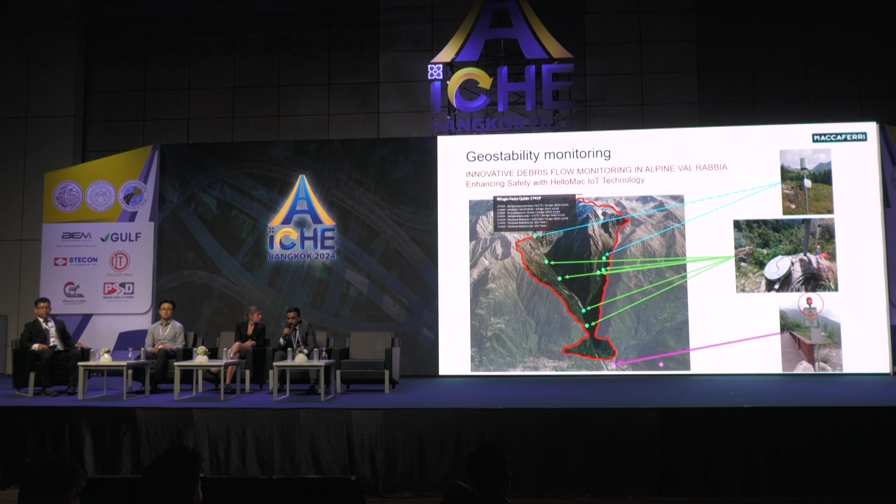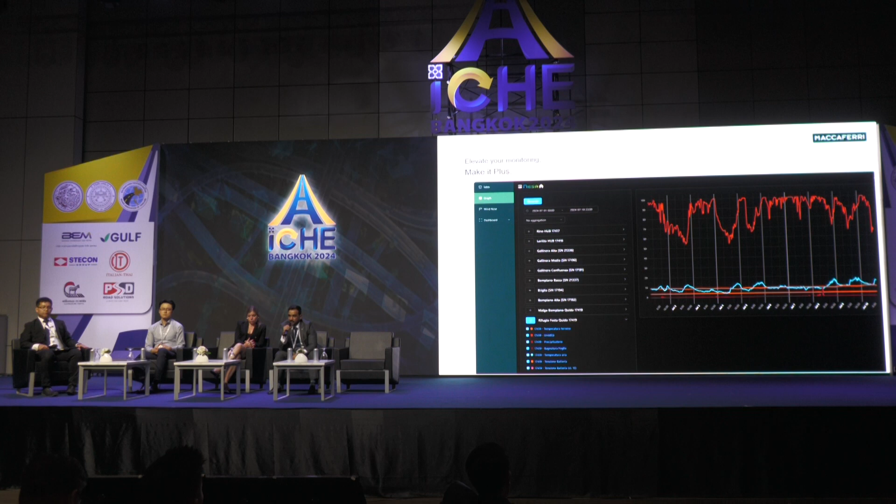And this is the graph that shows how the rainfall sensors work. Since we all know that every region is different, every region will encounter different intensity of rainfall, and every region will have a different level when it will be fatal for them.

So in this one, we can always set the alerts: green alert, red alert, or amber alert. Whichever intensity is too dangerous for the region, it can be put in that, and accordingly sensors will come.